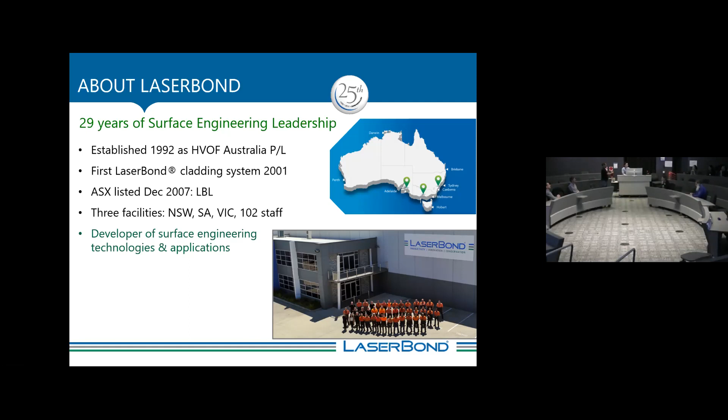So separate from the slide, it's working hand in hand. The divisions basically focus on coating and cladding services. On the left-hand side, services mainly cover the reformation of new parts. This doesn't contain only the coating or cladding process, but also the pre and post machining.

On the right-hand side, similar services, but for repairs. Then there's an area of technology that provides the development of systems, and for all our systems we provide the program. Last of all, the smallest but on top, of course, is research and development, where we develop processes, investigate materials, and explore possibilities.

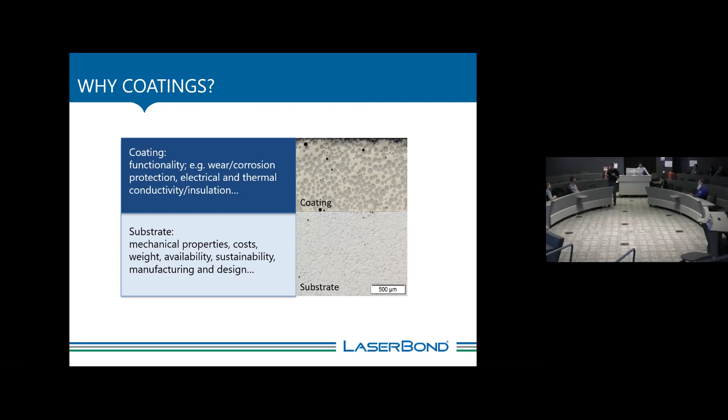Or also biological factors. So basically the entire process consists of looking at the operating environment. In the process of coatings development we've got three major factors: the operating and environmental conditions. Based on these, we consider corrosion, corrosion effects, pressures, different acids - it can be a very complex load collective. Based on this, we choose the surfacing material and, of course, a suitable application method.

But also, in addition to these two, the piece material - the actual substrate material - has to be considered. So I just want to highlight two of these.

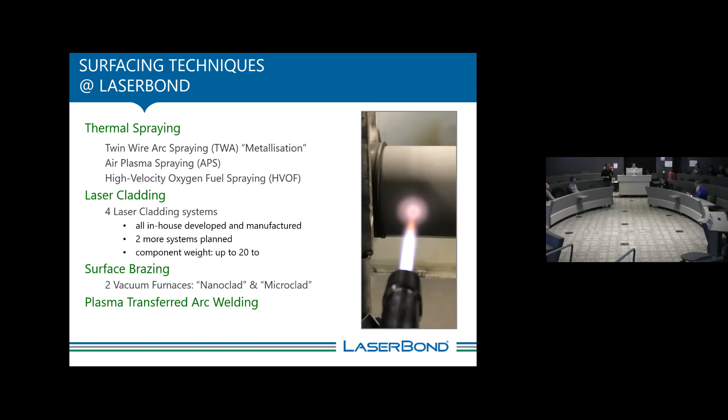So just basically the spray process - it's a line-of-sight coating process, and we typically work with metallic and similar materials. We've got a feedstock material which can be powder, wire, a suspension, or even other forms. These materials are fed in order to be heated up, in some cases atomized, and then deposited onto the surface.

Regarding the thermal energy, that can be generated by means of an electric arc, electric discharge, different types of combustion processes, or just an electrically preheated gas - this is then called cold spray. In that case we see gas temperatures in a certain range; I'll go to that one later. Typically these processes are very universal, able to apply basically any kind of material with a given melting point, at versatile thicknesses.

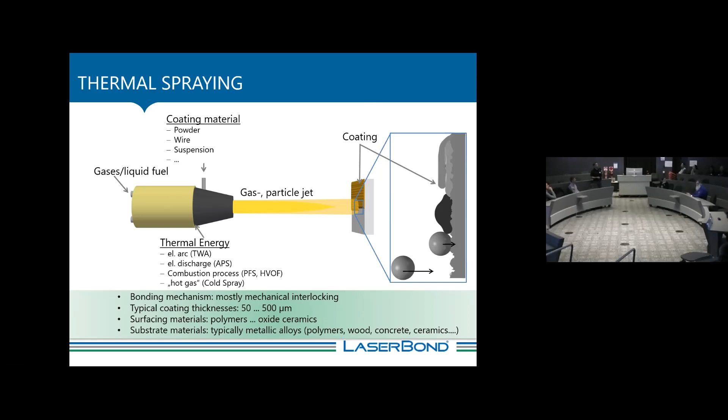These processes can be utilized again to apply polymers up to oxide ceramics or refractory metals. As for substrate materials, as I said, basically everything's possible.

Just a quick look at what's happening at the surface. So we have impinging, melted or semi-melted particles, at a certain velocity - depending on the process, between 100 meters per second and 700 meters per second plus. The temperatures also vary depending on the process. This melted or semi-melted particle hits the surface, flattens, and builds into the undercuts, so we need a rough surface here. It builds the undercut, and then we get mechanical interlocking between the particles, and the coating is built up by millions and millions of these single particles.

Just to give you some visuals of the processes - I mentioned, top left, the wire arc spraying or metallization. It's a relatively simple process, but still very useful for many applications. It's based on feeding two electrically conductive wires to create an arc between them. The electric arc melts the tip, and the material is sprayed onto the surface.

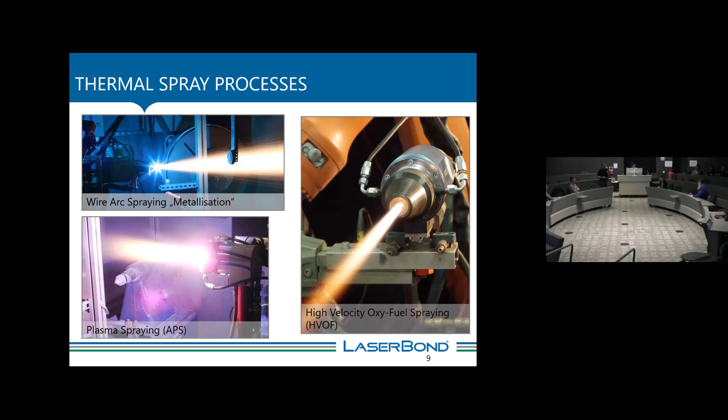For example, this kind of coating - if you buy a Porsche four-cylinder engine, the cylinder bore is coated. It's very cheap, very easy, but it works. It works fantastically - better than grey cast iron for this application.

Some applications for HVOF: Pelton turbines, landing gear, chrome replacement, ball valves in the chemical industry, amongst many, many others.

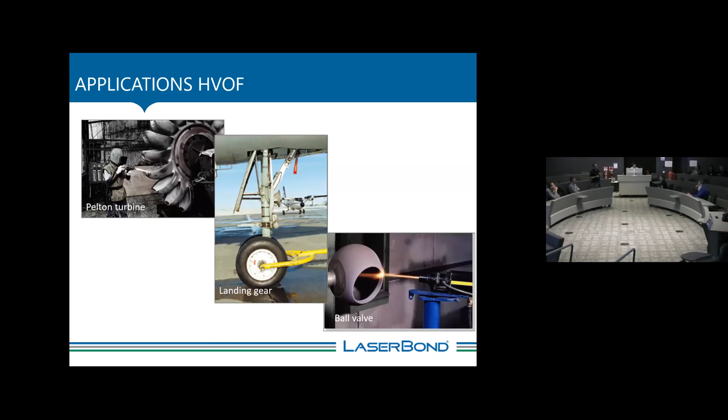This is the laser cladding process. We use - first of all, we still use the word laser cladding. If you Google it, there are other words that get more hits, but we've been using it for 20 years.

So if you look at the very bottom, you find laser metal deposition, direct laser deposition, direct metal deposition, direct energy deposition. They all basically mean the same thing. So we'll go with the original one.

So it's laser cladding. It is, to some extent, a deposition welding process using focused laser light as an energy source. So here we have a schematic.

I stole that from Andre - sorry for that, but your graphic was better than ours. So with this process, we focus laser light.

Nowadays, we started with carbon dioxide lasers, 10,000 nanometers. Now, typically, diode lasers are being employed. We focus the laser light onto the so-called spot.

A melt creates a melt pool, and of course, we have the relative dynamics between the laser beam.

Basically, heat up... we try to melt the surface as little as possible, then inject the surfacing material into that melt.

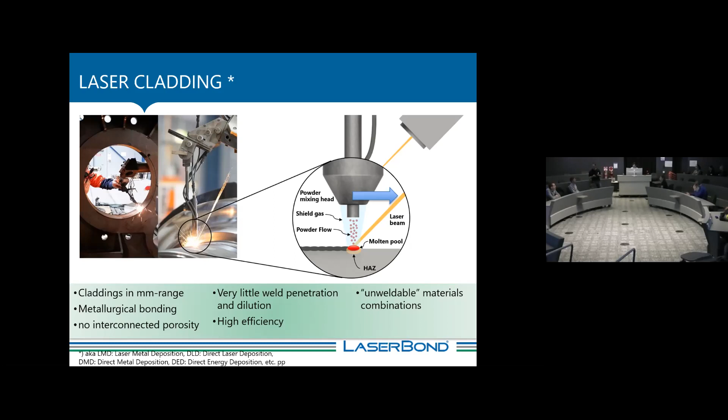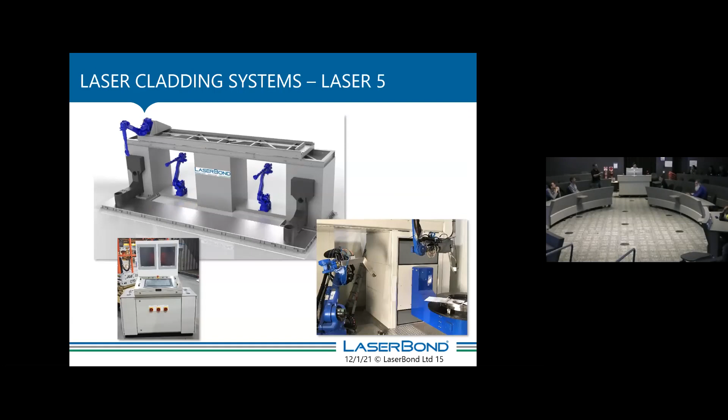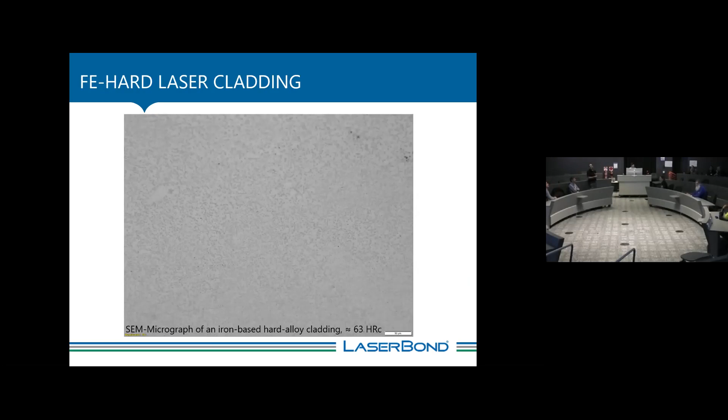What we're working on are so-called metal matrix composite claddings, basically not scaled-up hard metal. Unfortunately we can't get the carbide content that hard metal can achieve, but we can still go up to something like 68 or 70% in some cases. So what's in place in the actual cladding is a metallic binder, with the brighter points being the carbides, distributed here in the cladding.

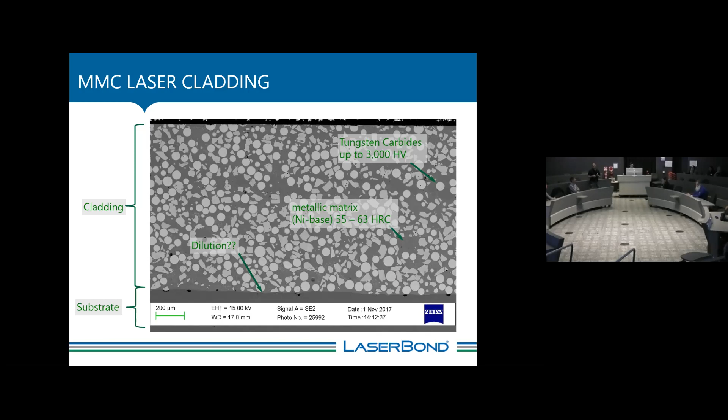With just the binder and carbides, we have a lot more to play around with. We can use different binders, harder or softer, more corrosion resistant or less corrosion resistant. Then we can even play around with the carbides, carbide size, and carbide types. So the advantage is I can tailor the matrix to combat impact, or I can tailor it towards corrosion resistance.

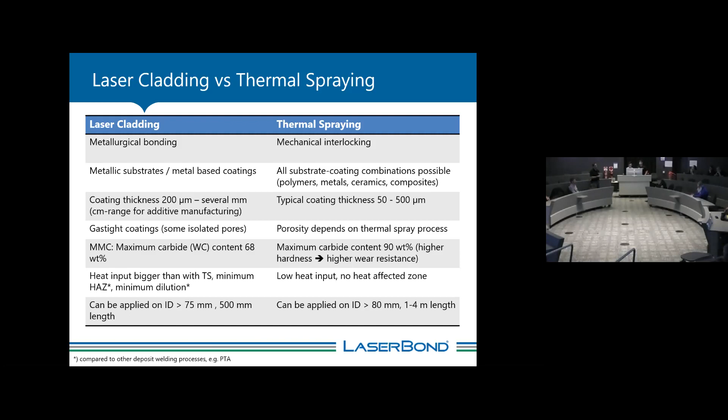Just very quickly, the materials we work on a daily basis with, and that give us the big leeway we have when it comes to tailoring coating solutions.

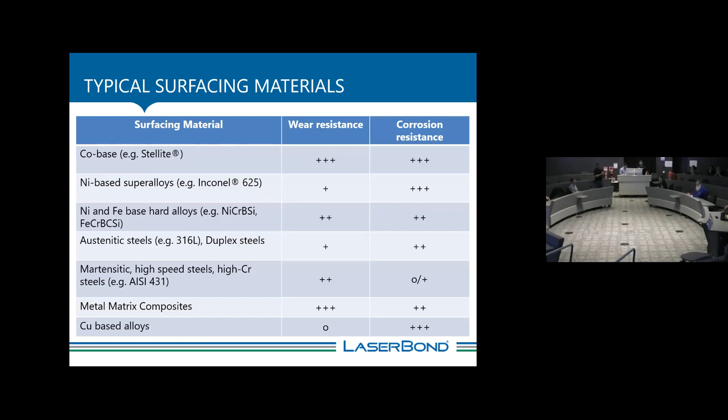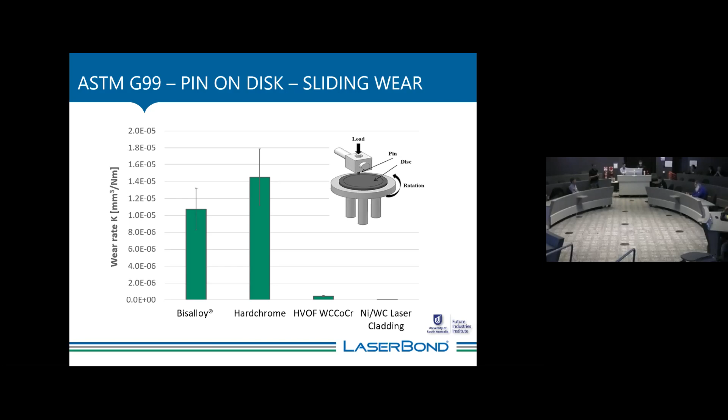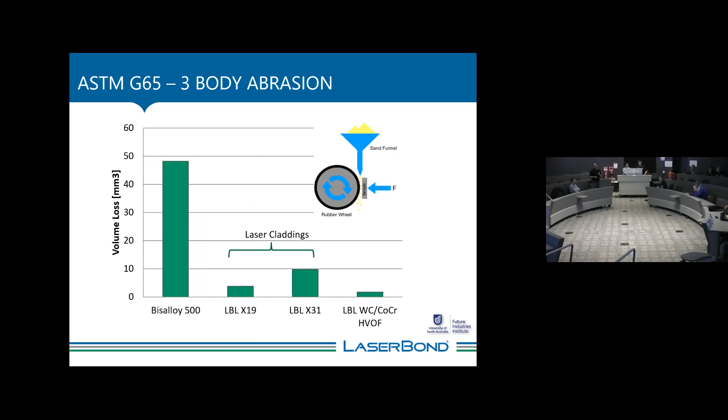Strictly dry erosion.

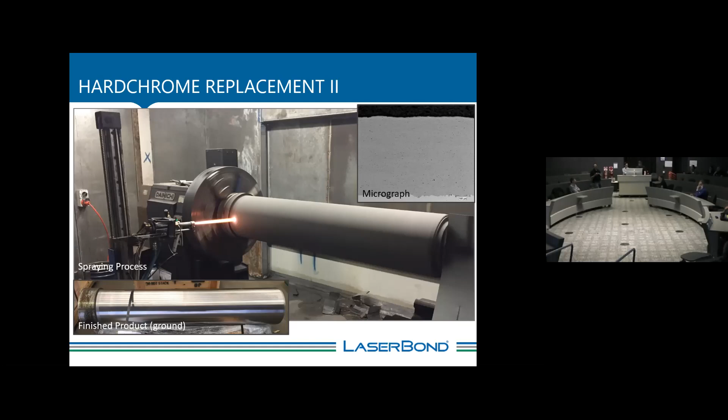Hard chrome replacement is one of the big subjects we're working on. There's a big need for this in Europe, it's very hard to set up new facilities. Chrome companies there get extensions - I think they've extended their licenses for another 7 years. But all the companies are looking for alternatives, and it can be done with both processes. We're currently working on iron-based alloys which won't outperform this largely costly material, but will become very close, and will outperform hard chrome.

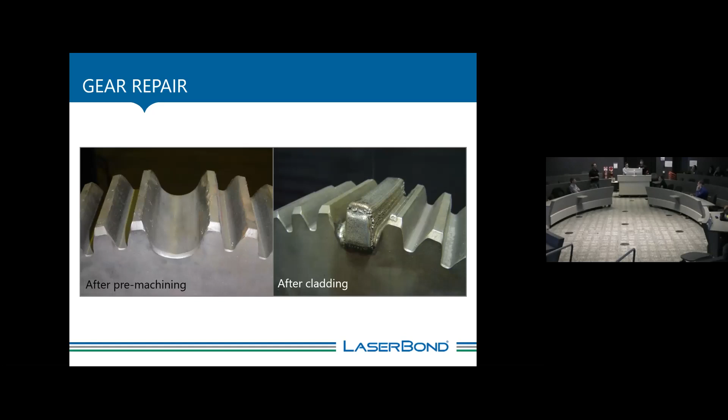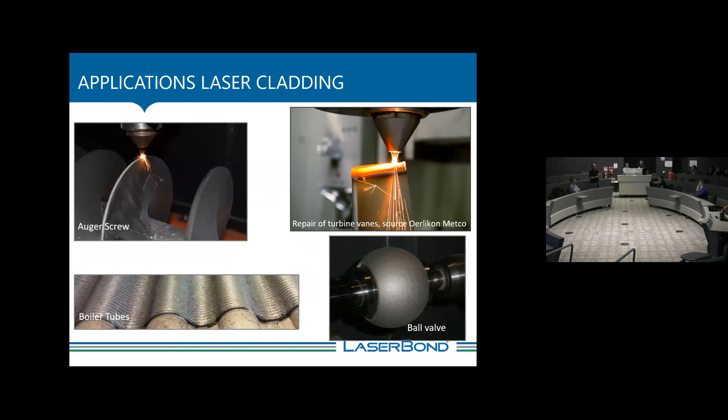Industrial sectors: we work with lots of mining and minerals processing in Australia, heavy industries, construction, manufacturing, energy, and hopefully some more in the future.

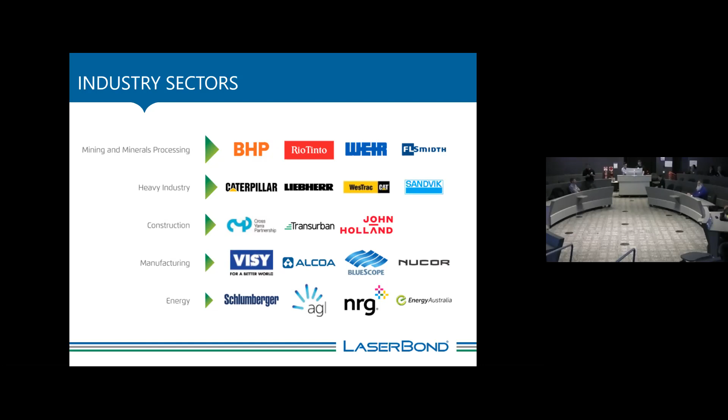That's a good one. Thank you very much for your time. Maybe can I cover? Do I get a question or not? Yeah. That's really it. Thank you very much.

Well, there's potentially a sensitive question that we might wish to ask. Relative costs of laser cladding versus HVOF. So relative costs in terms of the initial kit, the initial equipment, relative costs with regards to the initial feedstock. I'm not asking for numbers, just making assumptions. And relative costs with regards to operation. Consumables and operation. Any ideas, any ballpark figures for us?

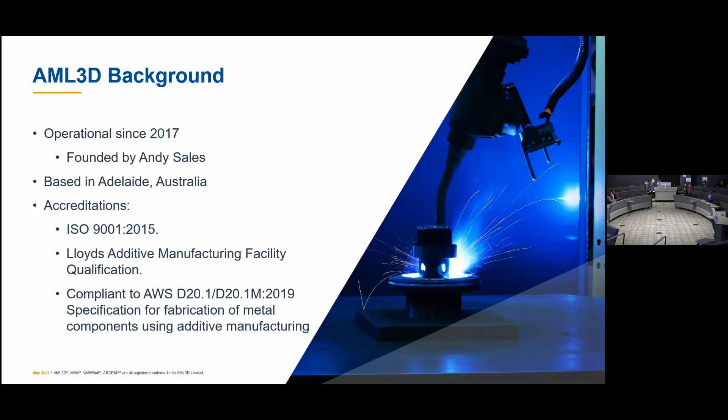Okay, so the company was founded by Andy Sales, based in Adelaide. One thing that's not on this slide, about a year ago, we got this good team. And about 50 people. That's quite a year of change. So, the basis of the process is MIG welding.

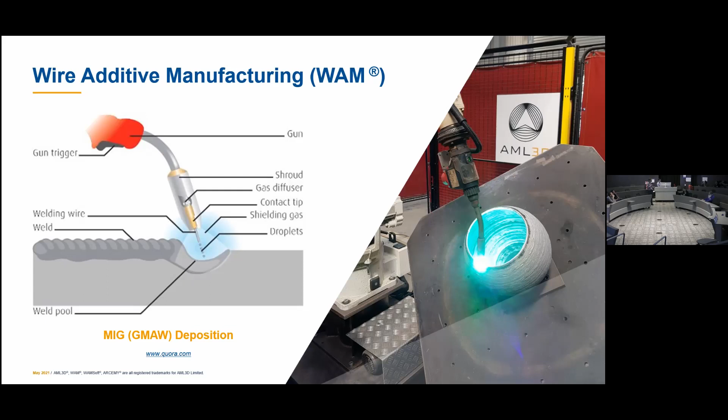So there are a lot of additive techniques out there. Probably the majority of them use powders. But in recent years, and there are a lot of advantages. There is an existing supply chain basically for welding, which we can use, and the wire itself tends to be relatively cheap. Thomas is shaking his head. We can debate that.

The main business drivers are, first of all, you can produce a part with less material, and particularly if you're starting with a solid block of material and then machining that to a final part shape, if you can reduce that material quantity, that can often lead to a significant cost saving. And where the material is particularly expensive, think of titanium, there is an opportunity for quite significant cost saving.

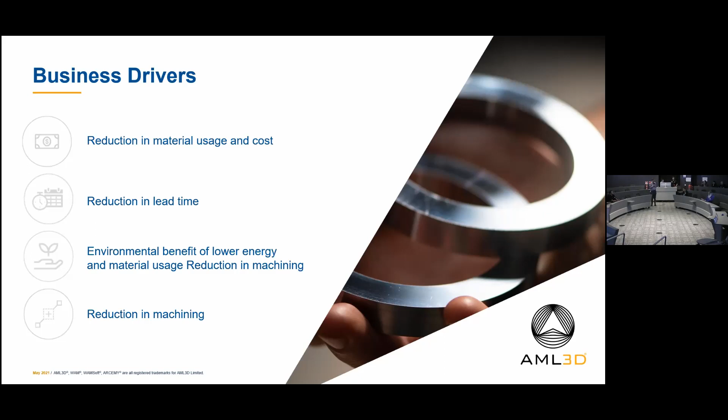Now the features over competing technologies. First of all, you've got quite high deposition rates with the wire additive technique. We've got relatively low capital cost of the equipment, so we're using standard welding power supplies, which are cheaper than a laser-based system. A wide range of metals can be deposited, so basically anything that you can weld. Okay, if you've got a welding wire out there, we can then produce a part with that welding wire.

In terms of the bead size of the deposit, we have got down to about 2 millimeters thick, but that really is a very narrow end. Normally, we're around 10 millimeters wide.

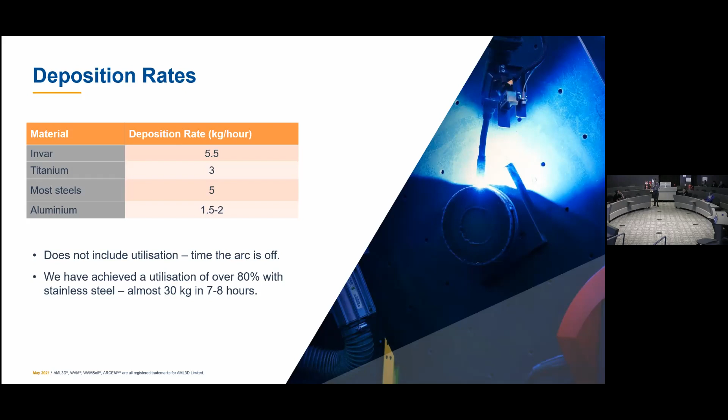I'll just touch a little bit on the MIG process. I don't want to go over something too basic. You have a wire that's coaxial to the torch. You then have an arc created between the end of that wire and the substrate material. And then there are a number of different ways of transferring that molten metal into a molten pool, which we'll discuss in the next slides.

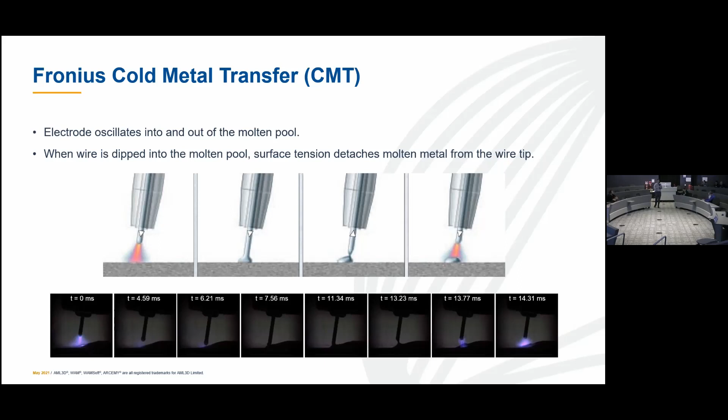Now, the unique aspect of the CMT is that the wire, rather than being constantly fed into the molten pool, pulses backwards and forwards. And so you have the arc that's created, that wire is then thrust into the molten pool, and that molten material is then deposited by surface tension, and then that wire is retracted backwards. Quite unusual. Most welding processes just have a constant wire feed. So when the wire is retracted backwards, you then recreate the arc, and then the whole process is repeated.

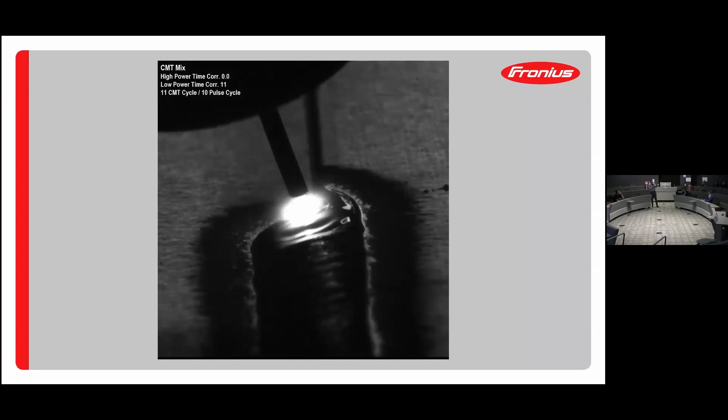On this next slide, we have an example of what's called the CMT mix process. So rather than going through all three, this is standard. What's happening there is standard pulse welding. So you're getting a pulse of current. With each pulse of current, you get a droplet. Now it's doing the CMT. So you can see the wire going backwards and forwards, and the arc is created as the wire travels backwards.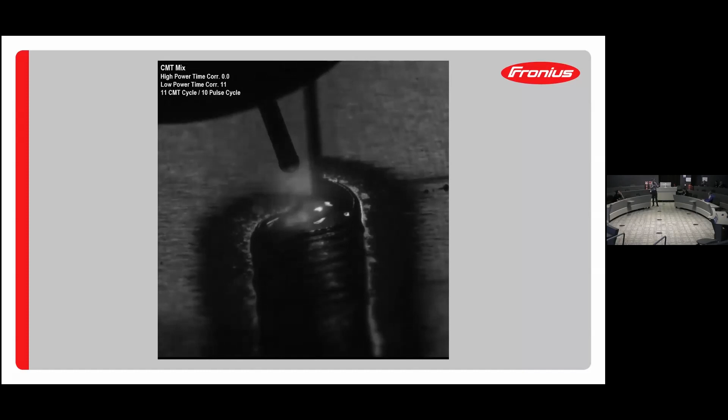So the heat input with CMT is considerably lower than the pulse process. And that's an advantage when you come to build these things by additive manufacturing, because one of the problems that you have is too much heat. So by using CMT, you can then minimize the heat into the process.

Once you've done that, we have our own in-house software that generates the parts, to produce the parts. Following on from there, we then have our own special software that runs the robot. And this is probably key to what we do: the software that runs the robot that then is able to produce the part without any problems or defects. Then we have part inspection, and then finally machining.

Now, these are the main list of materials that we have produced parts with. So you've got a whole range of aluminiums on the left, titanium alloys, both grade 5 and grade 23. The difference there is one has low oxygen and one doesn't. We've got a whole range of nickel alloys, and then the last column is steel.

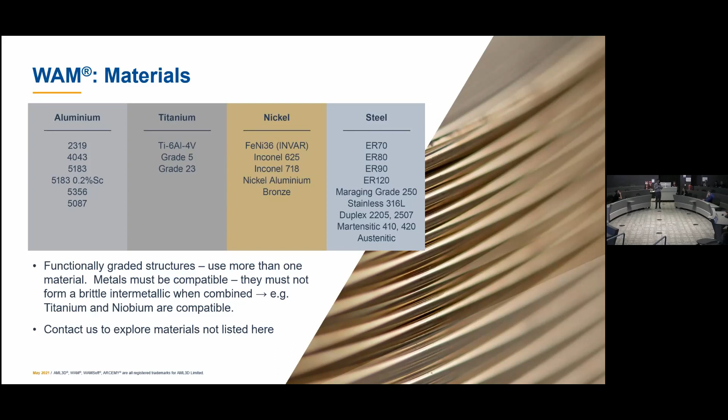Of course, there are more materials out there, and it's just a matter of getting time to investigate new materials. But generally, with the process that we use, it doesn't take long for us to develop parameters for a new material. So we can quite easily produce a part in any material that you want. We can also, and I'll touch on this toward the end, look at functionally graded materials. And this is very useful for optimizing the properties in different areas.

I'll just touch a little bit on materials and metallurgy. So the cooling rate is crucial to your product. In general, it doesn't happen with all materials, but a faster cooling rate gives you a more refined microstructure, and that translates to a higher strength. The cooling rate depends on two key things. First of all, it depends on the part geometry, and there isn't really much you can do about that: the part shape and the distribution.

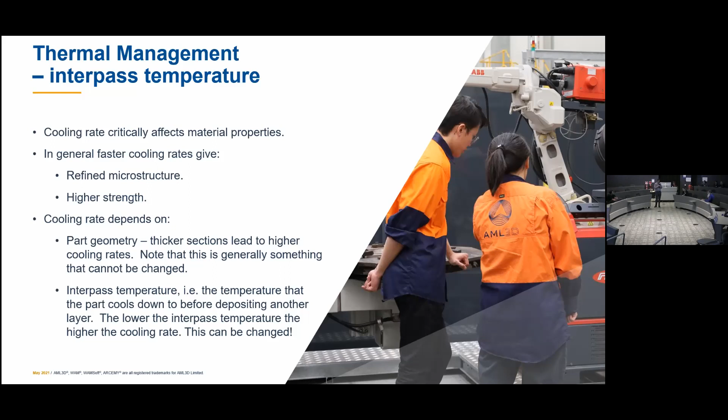The second thing, though, is the interpass temperature, for anyone who's done welding. Whenever you do a weld procedure, you'll often specify the interpass temperature. And so if you specify a lower interpass temperature, that gives you the opportunity to get higher strength. And we monitor this interpass temperature. We can do it one of two ways.

We can use a thermal camera, but we've actually found that a pyrometer is a much simpler method to monitor this interpass temperature, because you can point the pyrometer just above the area of the part where you want to deposit. Whereas if you've got a thermal camera, you've got this great big object that you're trying to control the temperature with. It becomes very, very complicated working out whether or not you can deposit.

If you're trying to control the interpass temperature and you're waiting a long time for it to cool to a certain temperature, you then need to look at ways to efficiently cool the part. And so we can do that with a blower. It's very, very safe. We don't use a normal compressor, so we don't have oil in the air. We basically use a big fan that's got low pressure but high velocity.

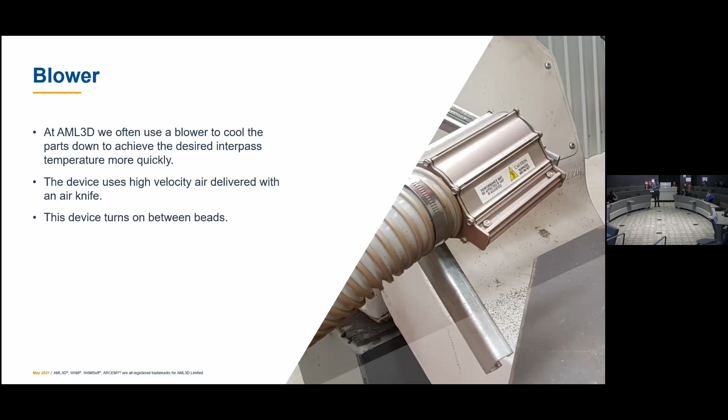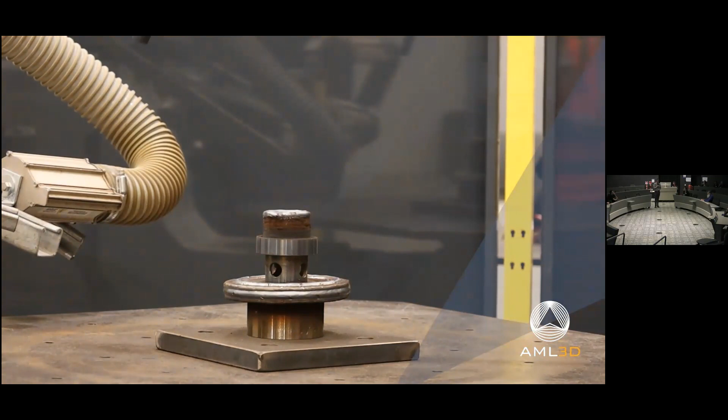When we build our parts, we also need to consider the height and keep track of that. So we have a laser sensor that does that, attached to the welding tool. And we now have a video that illustrates this, with music in the background. So you can see the welding torch depositing material, heat being deposited, and then you've got the laser measurement. One of the consequences of all our funding is we've now got a slick video.

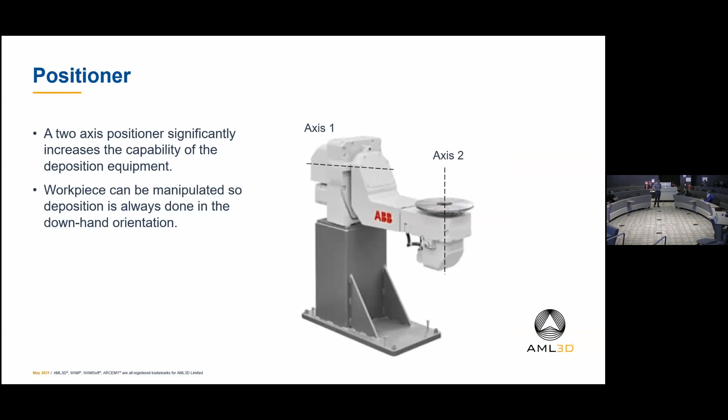As well as the robot, we also have a positioner, and this is the positioner that we have. It's a 2-axis positioner from ABB, and this gives you a lot more flexibility when you start to produce parts. So we have 4 main categories of parts that we can produce. The first one is 2.5D prismatic. This is probably what most of you will think of when you think of additive manufacture.

So 2.5D, the object that's shown there, as I said, is slicing, and you often then also need to think about how this object here has got stiffeners, and you need to work out how to do the intersection to the main body.

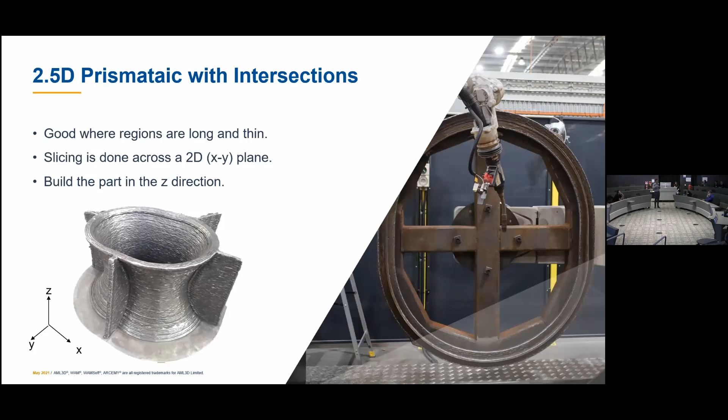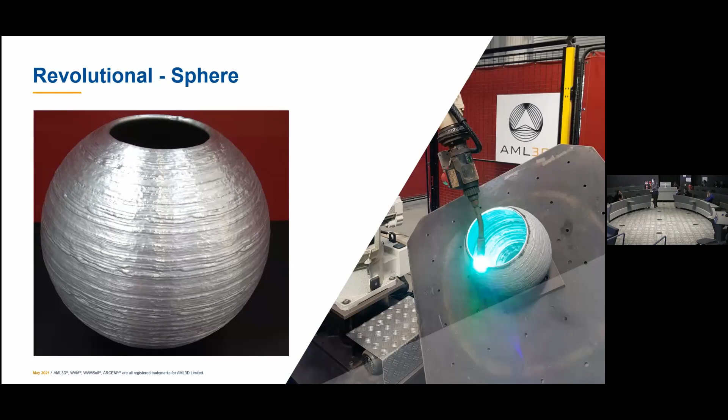So first axis, when you start, is at 90 degrees, and you start depositing on a cylinder. And then as it builds up, axis 1 moves downwards, and then at the halfway point, axis 1 is 0. And I forgot to mention that axis 2 is continually spinning around. So it's a little bit like a potter's wheel, where you've got the object spinning, and then you're depositing material as you go along.

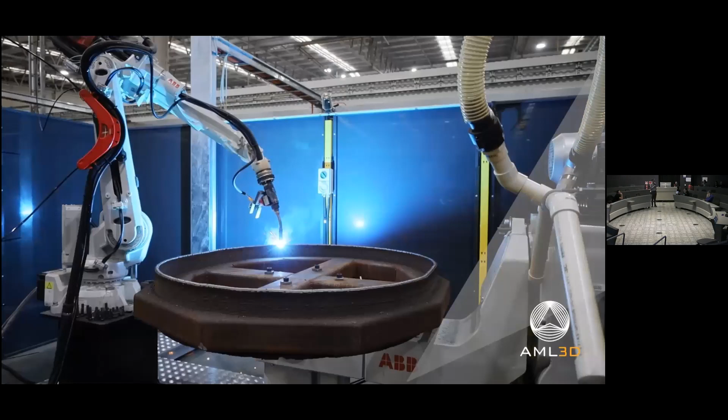Now this Panama hat is actually done by that method. So all that.

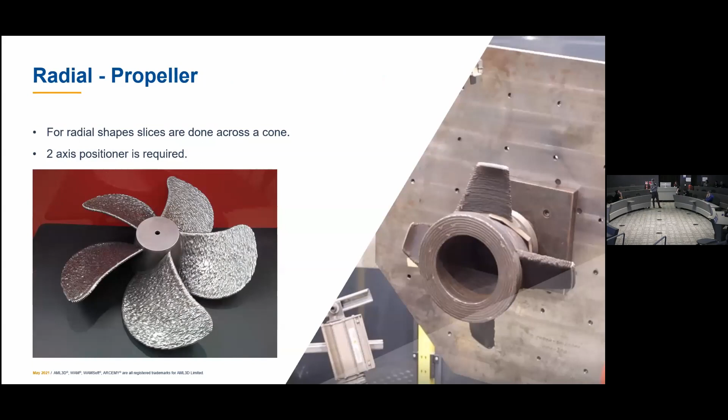Right, so propellers. So the slicing in this case is on the surface, with a conical surface, and once again we're using our positioner, tilt and then rotate.

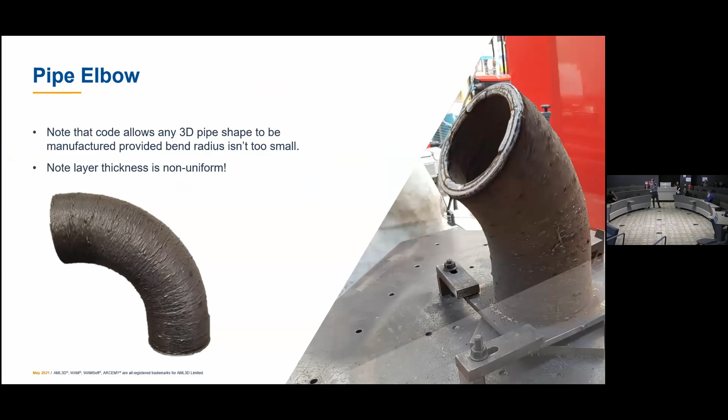One of the key things for getting the process to work is that you have this problem with layer height control. So when you start manufacturing parts, for example, you end up with a very low heat sink, and so your bead shape changes completely. Okay? So it ends up being much narrower and much higher. And so if you didn't do anything, what you'd end up with is a massive hump in the middle, and everything around it is much lower. And so one of the key bits of the technology that we've developed is to get around that problem.

So just some limitations of the geometry. You want to start with the substrate. It's usually the same material type. Ideally, you deposit in a flat position, although it can do positional deposition as well. And the robot positioner is used to do that.

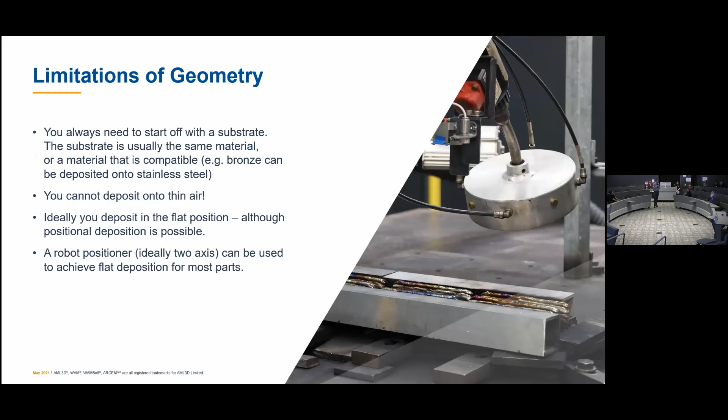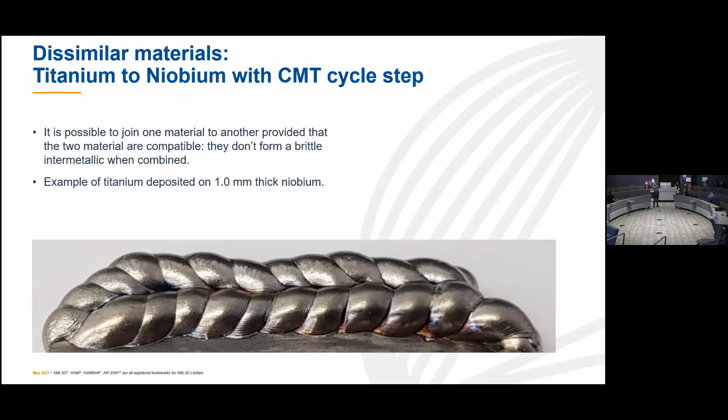This is an example of dissimilar deposition. So we've deposited titanium onto niobium. The niobium in this case was only 1 millimeter thick, so it's super thin. And so it was quite a challenge to not blast the material away, for want of a better term. So we used this process called CMT cycle step, which is developed by Fronius. So it should be quite obvious how it works with this video.

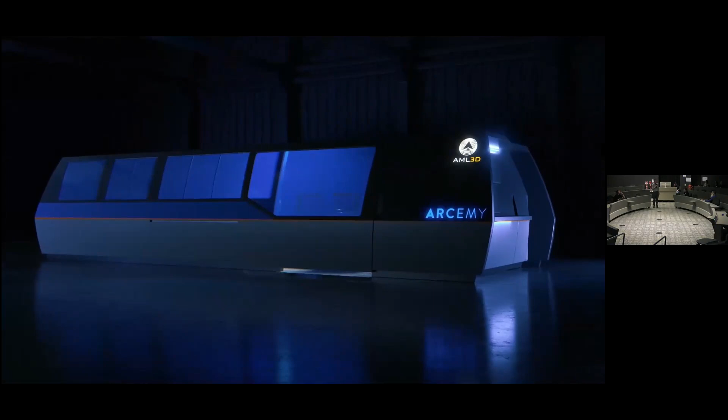Right, this is pretty much it. So we now have our machines. Video of it. It's still like a robot, you've got the power supply. All our software. You've got a positioner, storage.

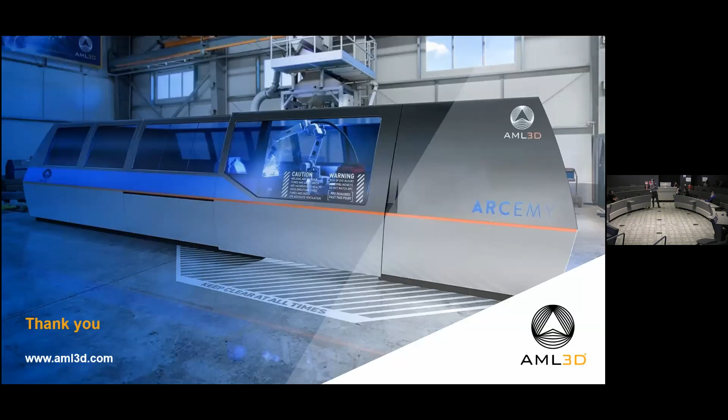The technology is developing right here in Adelaide, South Australia. I'll start with a question. This printing system, can you really just upload the CAD drawings, push a button, and then you wait for the part coming out?

You know, we're not quite at the stage where you can just do that. There is planning, and that takes time. And then once you have your paths, then you load those into the machine, and then you can manufacture your part. So there are a lot of stages in between, but they are sort of the main steps to manufacturing your component.

But you know, before you start manufacturing a part, you've got a lot of things to check. For example, collisions with various different things. But it's like anything, you know, you're going to have challenges to overcome. But as long as you're careful, then you can manufacture your part.

Colin is setting up his mic. Just a few words about Colin. First of all, Colin is my boss, so I can't say anything bad. Yeah. Colin is the first industry associate professor here at the University of South Australia. Again, as Peter said at the very beginning, here at the Future Industries Institute, we really embrace research that is inspired by industry. We really want to do applied research and not ivory tower research that just simply ends up in fancy publications that nobody needs.

Thanks, Christy. I'll try and bring it home, keep things a little bit lively for you in the last 20 minutes, 25 minutes, maybe a bit quicker. Cool. Okay.

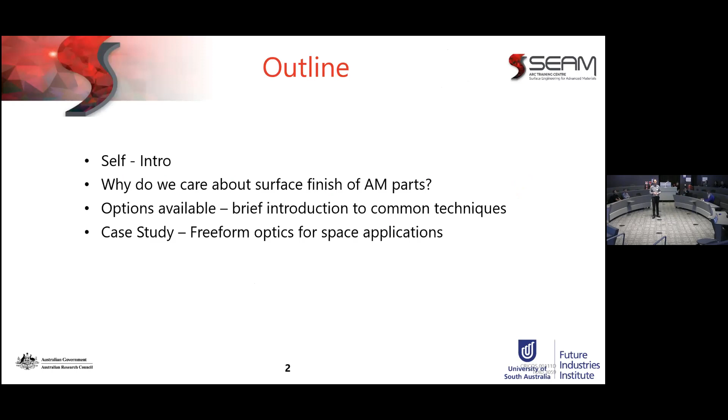So, surface finishing. Thomas and Paul have done an awesome job making the part, but it's an additively manufactured part. It's not in the shape or the surface finish that we require. Therefore, we enter this surface finishing, and that's going to be what my topic is talking about. So, I'll talk about myself a little bit. Why do we care about surface finish? Some options available. I'll just go through a list of them, and then I'll do a case study on a project that we're working on right now. Really interesting for space-based application.

So, my background, applied physics as an undergraduate. I went and worked for Sola Optical, which was the second largest ophthalmic manufacturer in the world for a while. I did R&D there. Did a lot of coatings work, so that's my background with coatings. I came to the university back in 2004, so I've been here 17 years, and during that time I've done my PhD in material science. Some of the projects that I'm working on right now, obviously really good collaboration with LaserBond in the mineral and mining sector. It's hard wear-resistant coatings, but also a little bit of work in medical. That's more the material science, quantifying material properties for medical devices, and the space one I'll talk about later.

Automotive, for the 17 years I've done automotive-based research, and they're decorative functional coatings for the industry. And that one goes back to 2011, a mirror lens production with our industry partner SMR. That ended up winning me the Prime Minister's prize for new innovators. And we've since then tweaked that product into decorative coatings, and they're being made here in South Australia and exported to certain supercars in Europe. So again, it's showing that UniSA partners with industry here in South Australia to develop new technology that's world class.

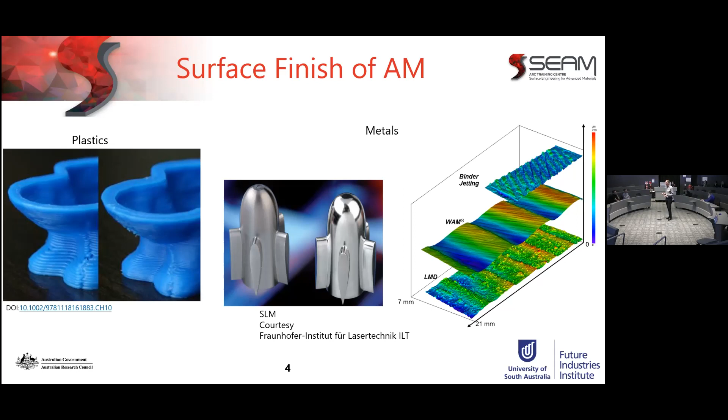So surface finishing of AM, I'm going to talk plastics and metals here because they're both relevant. The part that you get out of it is just too rough. It's not the shape that you want. It's not the surface finish you want. If it's plastic, it's normally a filament, and then that filament has steps. If it's selective laser melting, then you've got the particles and layer by layer again in there. If it's LMD, you've got larger layer by layer sections. If it's laser, it's finer, but they're there. And you saw in our Industry 4.0 lab, the binder jet, even that has layer by layer surface finish. So we need to get rid of it. How can we do that? Why do we want to do it?

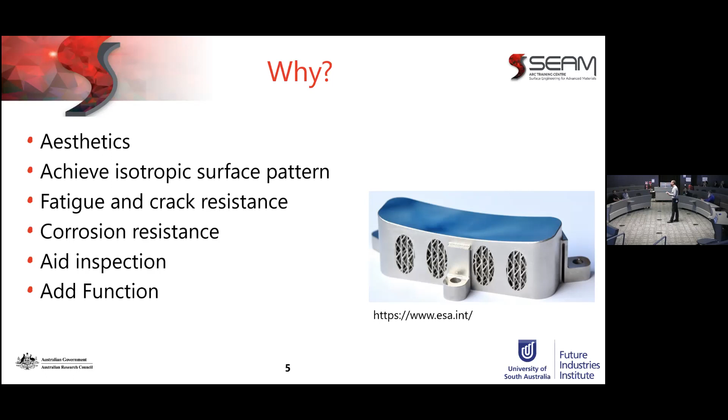Obviously, aesthetics. A lot of the time, we want the part to look nice, so we want to do post-processing. By doing surface finishing, you'll create an isotropic, even, uniform surface. That could be good for some situations. By creating a smooth surface, getting away from undulations, pitting, maybe even surface cracks, will increase its fatigue and crack resistance. Some of the post-processing options will increase the part's corrosion resistance. And as Paul said, for ultrasonic detection of defects, you want a nice smooth surface, as well as we can add function. So there's lots of reasons why we need to do it.

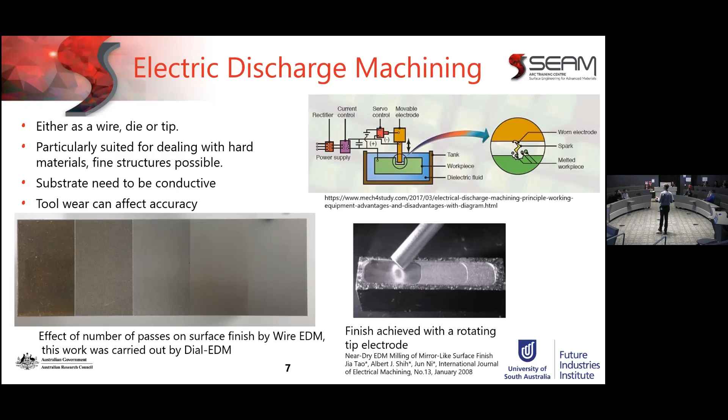Laser polishing. If Thomas has made a part and it's sitting on the table with a laser, he can turn the powder feed off and run the laser over the part to smooth it off. That could be a really good option for you. You're already melting it, so it may have some other effects on the surface finish or microstructure.

Again, you're remelting it, so you create a heating and cooling cycle, which can lead to hardness improvements. However, one drawback is that it's a welding process, so you may get some waviness occurring. You might get short range roughness improvement, but your long range roughness may still be set.

Typically this is done for metals, but I know the Fraunhofer has been doing laser melting of plastics to create smooth surfaces. That's what interests me.

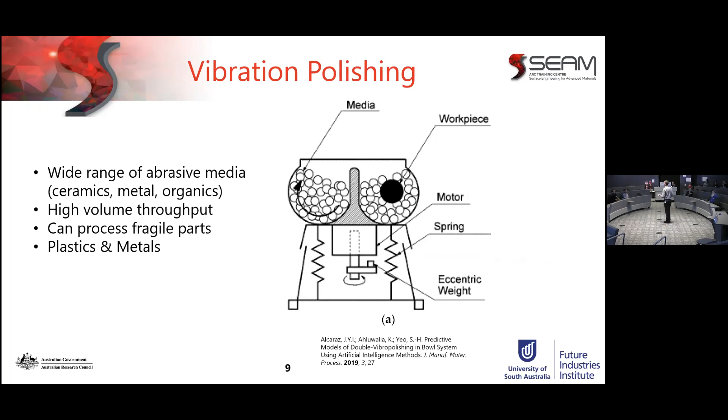Some really old school classic ones: vibration polishing. Get a medium, throw your parts in, vibrate it like crazy - simple, effective, very good for fragile parts, very good for plastics and metals. You can change the surface finish by selecting the right medium - how big it is, how hard it is. Organic medium gives very fine polishing.

Shot peening and ball burnishing - I saw Mohammed here, this is for you, he does research on ball burnishing. They've got a PhD student doing combined shot peening and ball burnishing for surface improvement. Shot peening will definitely harden the surface and improve surface roughness, but maybe not enough. Ball burnishing is a technique where you roll a ball under force across your part, plastically working that surface, which smooths and hardens it at the same time. Both of these processes are only useful for metals.

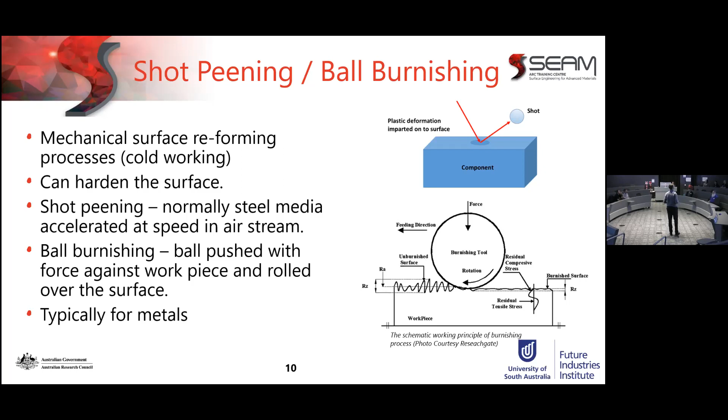Single point diamond turning. Now we're getting into very fine machining that can bring about very low surface roughness and near optical finish. A diamond tip is selected and machined with the right crystal orientation to make it hard wearing, so it will hold its shape during machining, and you can get a very fine surface finish with it. Good for metals and plastics.

There are some limitations - anything containing carbon will end up reacting with your carbon tip, so you basically chew through diamond tips like that. Electro polishing - most metals can be electro polished, nice and simple.

Hook it up to a power supply, dissolve a bit of the surface off, and you can create nice smooth surfaces.

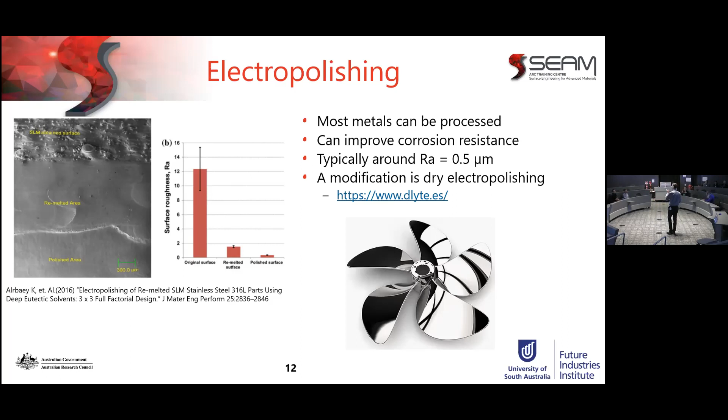There are refinements to that where you can do dry electro polishing with a conductive medium. You drag your part through this hard particulate conductive medium, so you've got abrasion, and on impingement you've got an electric discharge. So you've got both electrical discharge machining and mechanical wear going on, and that combined can create a very smooth surface. It's a refinement of electro polishing.

And good old grind and polish. Any metallurgist will tell you to get a nice metallographic sample, you grind it and you polish it. Grinding is a two-body wear process, a little bit harsher, giving you micron-scale roughness. Then you move on to polishing, which is a three-body abrasive process, a little bit more gentle, going through successive finer polishes to get a mirror finish.

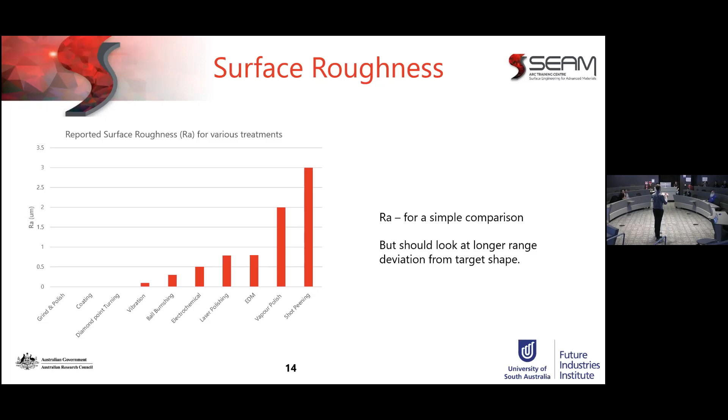So, case study: where are we applying this know-how and why would we want to? So, project with Camille Zuber, a researcher here, and a few other people, are working on freeform optics for space-based applications. These are complex shaped mirrors that go into sensors on satellites, used for imaging either the satellite or the Earth as it passes over.

Obviously it's going to be a complex shape. We want it lightweight. We need to pick the right materials so it will burn out on re-entry. It needs an optical finish. We have to be very dimensionally accurate, both at the small scale and the large scale. We don't want roughness, because small scale roughness leads to scattering of light, and large scale roughness leads to distortion of the image. And it's small in numbers, so low volume, one-off parts.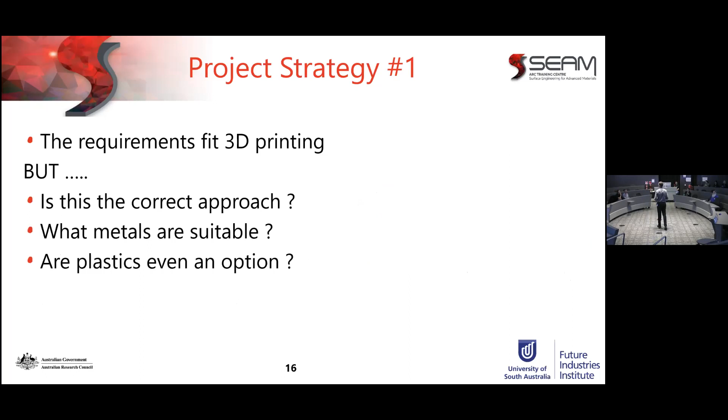So it really lends itself to additive manufacture. Can we additively manufacture this part? Can we do it to the right size? What materials should we use? Can we do it out of metal? Can we additively manufacture a plastic part and still get to parts? These are the sort of questions we're asking in this project.

So there are space-grade plastics. We can print them in the Industry 4.0 lab in school, and that's what we've started to do. Jevon is still here - he's the postdoc working on this process. So anything I say here is what he's done, and I'll just make sure he gets credit.

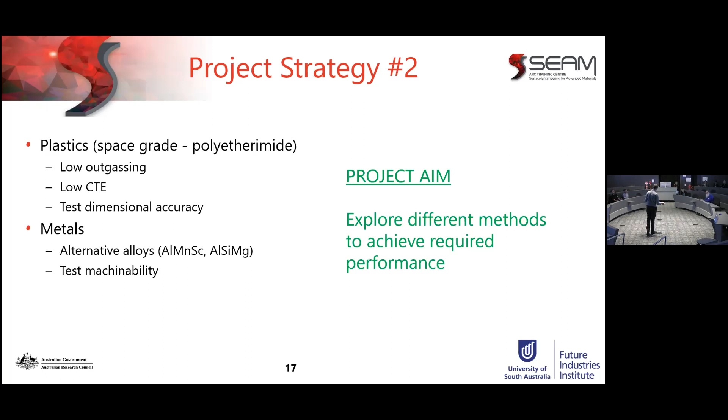These space-grade plastics have low out-gassing and, for a plastic, low coefficient of thermal expansion sensitivity, and we need to work out what sort of dimensional tolerance we can get. There are metals out there you can 3D print and get the right sort of tolerance with. This project is going to look at alternative metal alloys made for extra value or extra performance, and then we need to work out how to machine them. So that's the project's aim - to explore what options there are and then work out what's feasible.

Getting onto the plastic stuff: this is space grade plastic, two different grades of it. As printed, it's filament type printing, and you end up with a very porous, open structure. If you try to grind and polish that, you'll just expose more and more holes of the porosity. So Jevon worked up an annealing, or fusing, process to get a solid object. The approach we've taken just now is grind and polish. Next on our list is to try the single point diamond turning alternative.

And that's happening. But surface roughness - talking about what we can achieve - just grinding it, we're at 0.3 microns, but once we get to our polish, we're into the 9 nanometers. On the small scale that's good enough for us, but you can see up there we've still got some large scratches in the polish, which isn't quite acceptable.

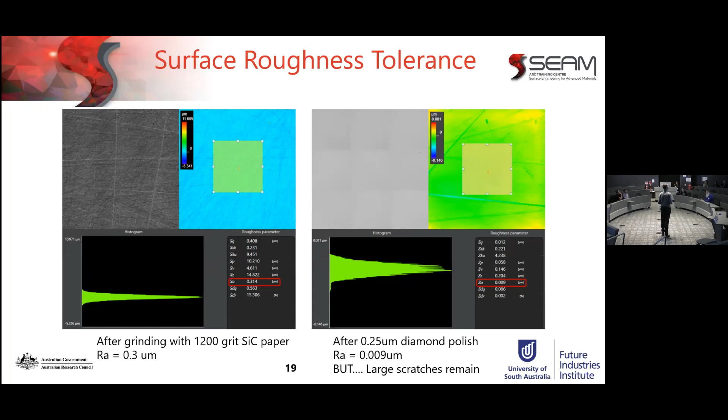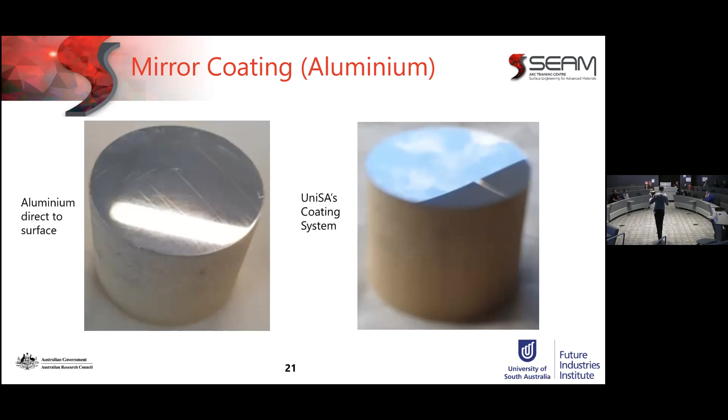So when we mirror-coat it, if we put an aluminium coat direct to the surface we've polished, we get a mirror finish, but it's cracking. So that's where the coating comes in. The image on the right is that same part, polished but then overcoated as well. In our University of SA coating system, it's a liquid plus vacuum coating process - we put the liquid coating on, it self-levels, fills in voids, gaps or scratches, and gives us a mirror-like finish to then put the metal down.

Our coating system, we've been working with automotive for a long time. This coating system has gone into production, and SMR have made 3 million mirrors. They've been in service for probably 10 years now. The first mirror was made in 2011 and it's been on the car for 10 years. So we've got good

durability, good product data out there, so we know it's durable. For a space-based application, we're talking a very harsh environment, very harsh UV, exposure to oxygen radicals. This system puts the metal layer as the very top layer. Metals are good at resisting UV radicals as well. So we think it's going to be a stable coating in this type of environment.

Will it be a good adhesion? Yes. So the coating stack is 5 layers, and each layer is picked to do a particular function. The very first layer is this compatibility layer. We've done it on metals, and it was originally designed for plastics, but we tweaked it. We think that no matter how much surface finishing you're doing, you'll probably end up using the coating system, because then you can overcome any surface imperfections, but then you pick what metal you're going to be having as a reflective surface, and then tune the reflectivity to the properties involved.

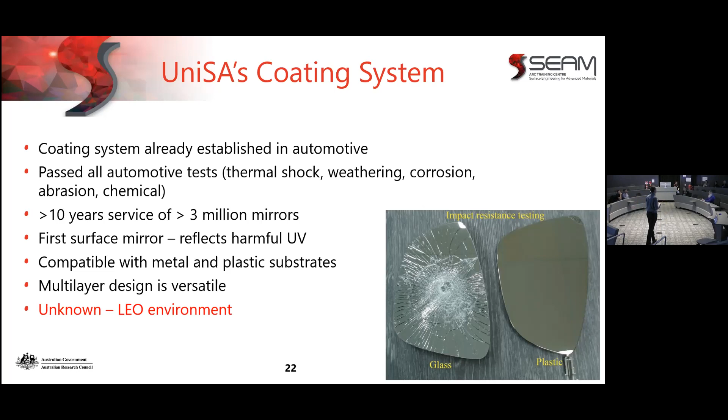If it's an infrared sensor, you might put gold down, so you're very reflective in the infrared. If it's an optical system, you might want aluminium or silver, so you're very reflective in the visible. That's one part of the nicety about that coating stack. I think I might skip that.

Metals are obviously a lot better. The other one is outgassing. How much are these plastics going to outgas? Again, we've got this TML, which is a measure of the mass loss. If it's less than 1%, it's okay. So for those plastics that we've got there, they're okay.

But if you actually look at the graph, there is the pressure rise due to the plastic being there. You can see the pressure rise up there. They do outgas, but they're acceptable. But if you look at the very bottom line, there's a green dots across the bottom, and that's what happens for the metal. So metals don't outgas, plastics do.

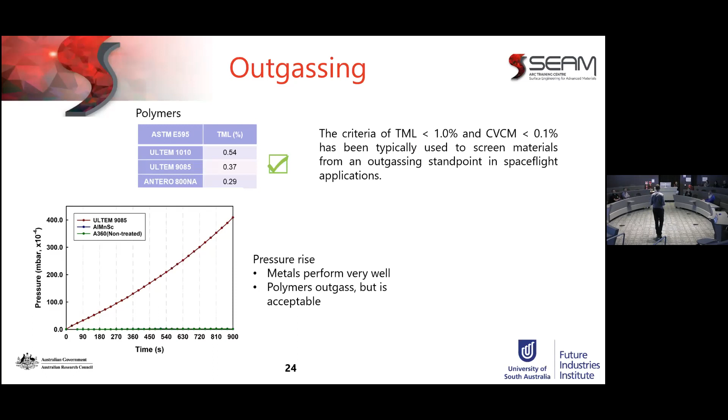But again, it's probably acceptable. So at this point, we can print the plastics. They're probably okay for CTE, they're probably okay for outgassing. So what's next? We need to get onto these complex shapes and use single point diamond turning. And then we're working with one of the partners, Amaero, to look at some of their more unique metal alloys to repeat this process on.

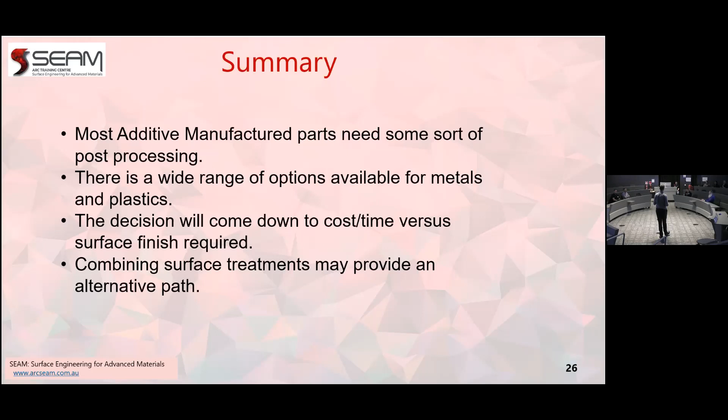Quick summary: most additive manufacturing parts are going to need some sort of surface finishing. There's lots of options out there. The decision will come down to cost, time, and what you need to achieve. Don't be scared of just going with one process if your requirements are very high. Try combining different processes and you might be able to get where you need to be. Cool, thank you.

I'm trying to get everyone else. Do we have any questions from the audience? Mohammed has one. Now, do you remember the question that I told you?

Colin, thank you very much for your nice talk. I don't have a question, but comments though. I think it's a very good talk. You actually captured some of the aspects and approaches people have been using for surface treatment, monitoring the surface roughness, and also altering some of the mechanical properties, which is a very good thing. And then you presented that 3D printing, and then you are going to use the coating, right?

Yeah. So is it possible we can even, without coating, finish and get the mirror, reflective mirror, directly by the surface finish without coating? Yeah, I think for metals, yes, there's probably is.

So the guys at DSTG have used aluminium, because they want aluminium-like reflectivity. So they've been using aluminium and doing single point diamond turning of that. Actually, it deforms instead of cuts, so you end up smudging the actual surface, the shape that you want, so you're getting distortion of the shape. So I think it's possible, but work needs to be done.